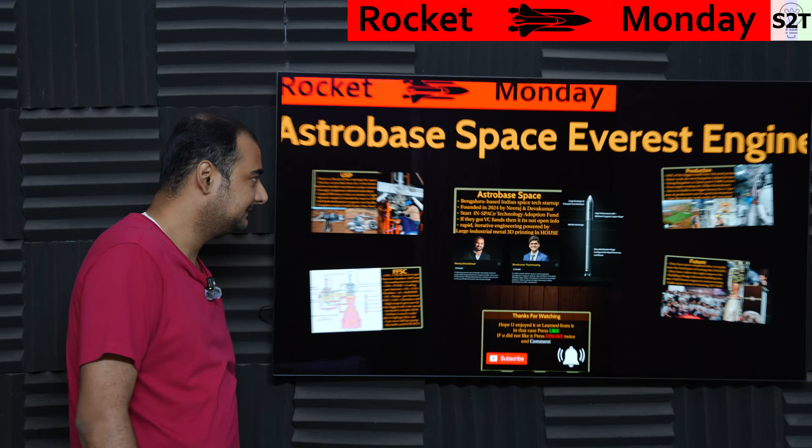So this puppy, Astrobase Space, is a Bangalore-based tech startup. Basically, Bangalore is our Silicon Valley, and it was founded in 2024. So it's a very young puppy, like horrifyingly young puppy. And Neeraj and Devakumar, these two individuals are the main horsepower behind it.

And the key ingredient, basically starter ingredient, I should not say key ingredient, starting ingredient is that the Indian government wants a private partnership. So they created a big grant, which is the IN-SPACe Technology Adoption Fund. So if you show your company and if ISRO finds it worthy, they're gonna give you some amount of money from that fund. It's not that big, that's why I'm pretty sure they have a venture capitalist fund.

But so far, as I'm making this video, as I have checked it, it may not be open to public where they got the money, because I know Skyroot got a lot of international funding, so there is a very good chance they also got it, because the IN-SPACe Technology Adoption Fund is better than zero, but it's really not that much. So that data is missing. It's not illegal, the government changed the law, so it is not illegal at this point in time. It's just that they are not sharing that with the public.

And their core essence, what they are bringing to the table, is this rocket, which is not the key point. They know that rocket is easy. They know the hard part is engine. Basically, if you think rocket is hard, hardest part in the rocket is the engine. So they're like, okay, we're gonna focus on engine first, because you can do tanks at the side, but you can't do engine as a side project. Engine has to be the primary project.

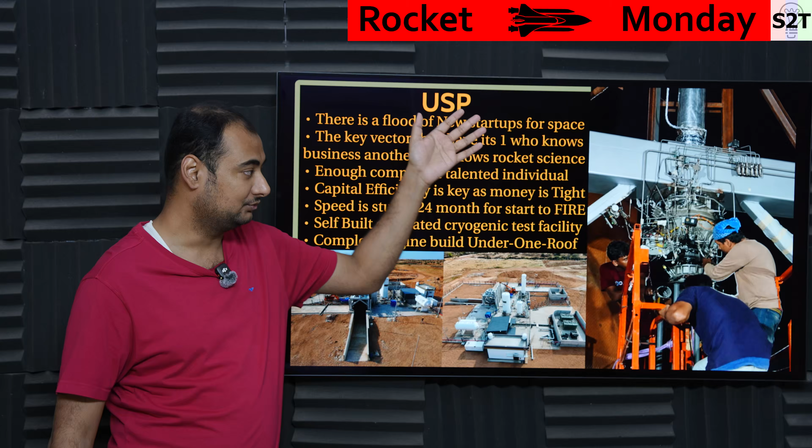But you have to be efficient with that, because again, they're not buying cheap things. That printer is expensive. So the fact that they went from company registration to actually ready to fire engine. Again, they did do fire, but on a small scale, like injector testing and all that. But reaching a point where you can see, okay, this is the rocket engine we are building.

And they only started 2 years ago. That's fast. And so far, so good. Almost reaching the same point where the other companies can. They built this dedicated cryogenic testing center. This is a big deal because while there are a lot of companies in India, ISRO knows this data point from a fact that not everybody has a rocket test site.

Yes, you can build a small testing site in a remote area where you can test some thrusters or a very small engine, but anything significant, an orbital class rocket engine, even one of that engine, that's not happening. None of them have that. So right now the current approach is that you go to ISRO, ISRO organizes it for you. Problem is ISRO organizes it with you.

For example, if ISRO has a priority requirement for any of the national projects, let's say NavIC navigation systems or PSLV upgrades or GSLV Mark III upgrades or whatever have you, you're just gonna be slid. You have to deal with that because again, ISRO's infrastructure is for ISRO first. Then you have a lot of other companies also betting on that same infrastructure. So a lot of scheduling hassle.

Now, the idea is, of course, they're gonna go to ISRO for the final testing, but to do rapid iteration, counting on ISRO is like government bureaucracy. So the idea is they're gonna build their own cryogenic full scale test stand, and they're gonna do rapid iteration here. Once they're fully ready, fully cooked, they are satisfied, then they're gonna go to ISRO. That is a far more logical approach.

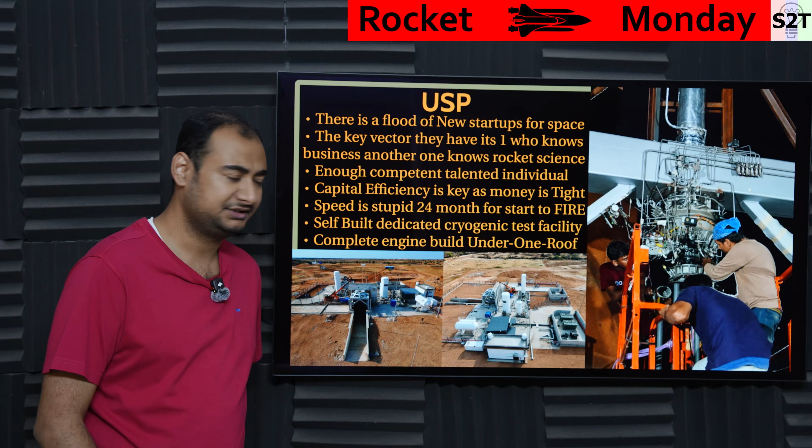And I can easily see that, assuming they have that sort of wiggle room left, they can recoup investment from this very effectively. So this shows a certain level of maturity. Even the 3D printer, assume the company goes bust, that printer still would be valid. We have this 3D printer, we can either sell it out for a bankruptcy or spin it up as a service. Tangible benefit, so to say. So they have a certain level of maturity.

They built a stand, they tested the turbo pumps, which was very clever because again, how the heck you gonna spin a turbo pump? You need a multi-megawatt class motor that spins at like 30,000 RPM or maybe more than that. Yeah, that's not happening. So they're like, hey, what if? Hear me out. We flow water through it.

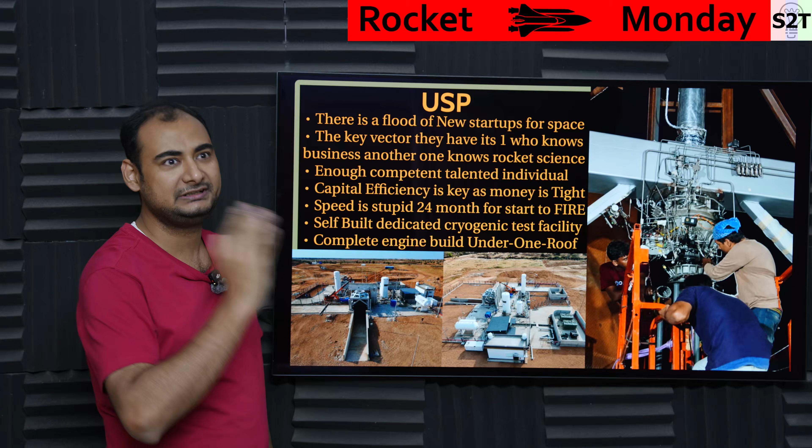Again, water pumps are available. A multi-megawatt class water pump is like, bro, who cares? So what if you use that? It's stressful because water is high density compared to methane or even oxygen, but clever. So they do have certain things that tell me that they have been cooking this for a long time. They thoroughly thought out what they're gonna do, how they're gonna do it, what they're gonna build, and they have some grunt behind it.

Now, full flow staged combustion. Assuming you have not watched my video from years ago where I already covered this - if you have watched that, skip this. If you have not, let's dive deep into it.

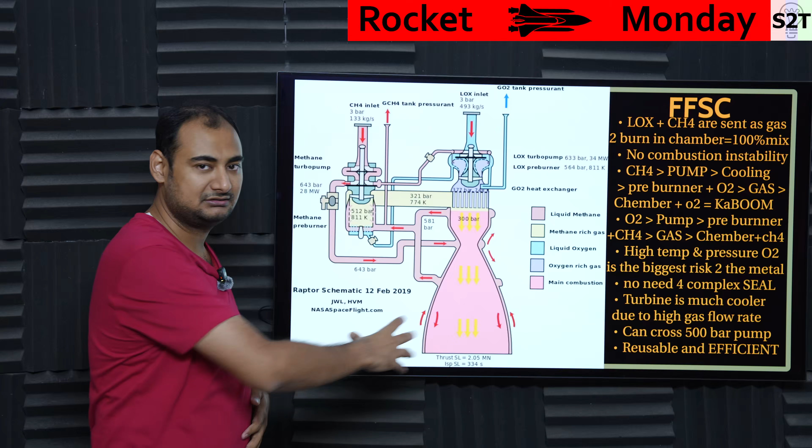So you start with LOX and methane. You start with liquid CH4, it goes in, and you send it to the pump. The pump dumps pressure into it, a bonkers amount of pressure - give or take 600 bars. That is a GG amount of pressure. You have cryogenic liquid with a bonkers flow rate that goes through the engine, the bell nozzle itself, and you cool this puppy.

Now you have rocket fire going on here. So this bell cools down, and the fluid that was cryogenically cooled at this point in time starts to boil. Then it goes into the pre-burner.

Pre-burner, you do math here. Basically, if you figure out, hey, I'm going to flow give or take 133 kilogram per second, how much oxygen do I need to properly vaporize this? So the small blue pipe you're seeing is designed such that - let's go with a number - say they need 5 kilogram of liquid oxygen flow to make sure that when they burn that 5 kilogram of oxygen inside the methane flow stream, it will vaporize 100% of the methane.

The key is, here when this cooling happens, some amount of methane becomes gas, not 100% of it. Here, 100% of it becomes gas - high pressure gas. So that's what they're doing. This fat pipe carries some amount of carbon dioxide, some water vapor, and a bonkers amount of methane gas going into your injector plate.

Now, so far this seems extra convoluted - why are you boiling off all of your methane? If you look at the F1 engine of Saturn V, that had something known as combustion instability. Combustion instability is a side effect of liquid combustion - if you have liquid oxygen firing on a jet of liquid kerosene, you have to atomize it. On paper it sounds easy - spew the jet, atomize it, burn it. In real life it's like lol.

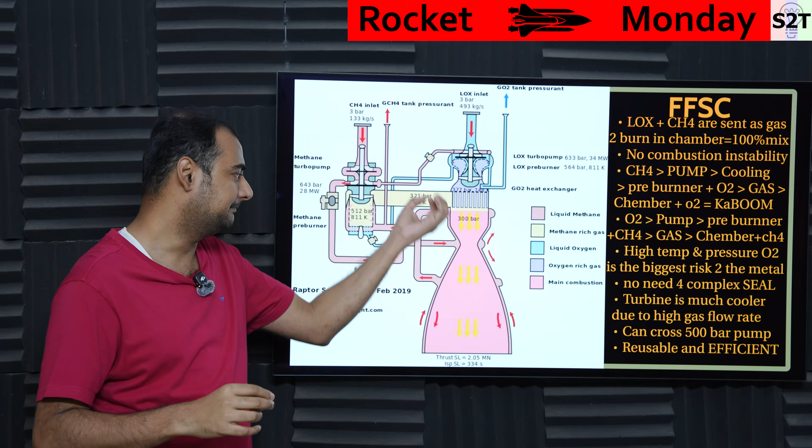Now you have two gas streams, high pressure, high flow rate, and it burns. Because the starting pressure was 600 bars - even in this liquid turbo pump it was 600 bar - after going through all that hassle, you're still at 300 bars of gas, and then you burn it. So then you go whoosh. That's how they achieve it.

Now, they do not want to use liquid oxygen or gaseous oxygen specifically anywhere, because that sort of gas at high pressure, high temperature, high flow rate will cause damage - it will eat through it. There is no metal known to man that can handle that. So how does this area handle it?

Well, this is the reason why oxygen is on top - they're like, oxygen, oxygen, go. They do not want to circulate it and delay - that's the whole requirement. And this turbine is the black magic technology.

The Soviet Union burned money like there was no tomorrow on this. America almost thought this was impossible to do. And SpaceX now has a patented metal that grows a ceramic layer in order to make a so-called turbine that the oxygen reacts with - it creates the ceramic layer that allows the turbine to survive. That's the black magic part.

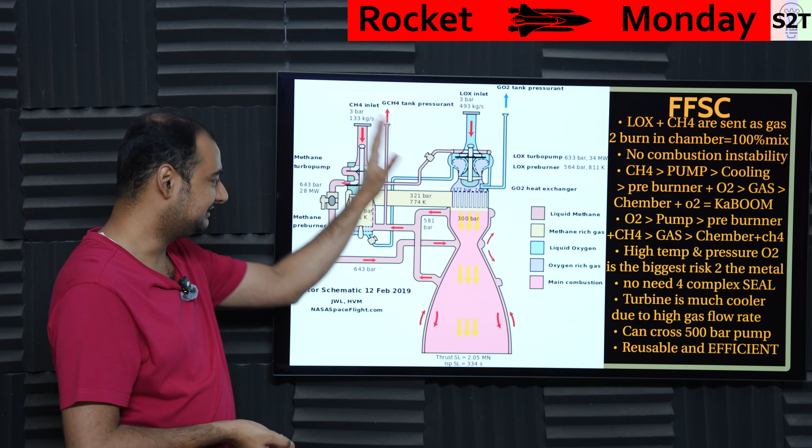This is difficult, but not impossible. This is black magic - how the heck do you have a turbine that can handle this? Burning itself, that's easy. What is the flow? Flow is high temperature, high pressure, high flow rate oxygen gas - metal burns at that point in time.

So somehow they have to have this black magic technology here. And that's the special sauce. Again, the plumbing is also a hassle.

You remember, like I talked about, it is already pressurized. That's why starting a rocket engine is so cumbersome, and you can't just have a starter motor spinning these things up. You can't have enough pressure. So generally they use nitrogen flushing to start all of this, spin, start and all that. It's a very tricky ignition sequence, so to say.

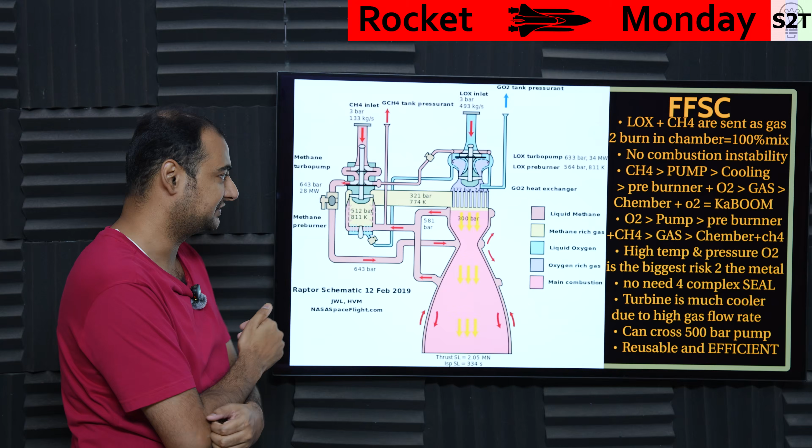So you take oxygen, burn it, whoosh. You take methane, basically pressurize it, cool everything, boil it, whoosh. That's how it works. And some amount is always tapped up. Let's say you have some amount of liquid oxygen, you're gonna boil it and then send it back into your tanks to pressurize it.

Again, I'm not sure whether Astrospace or Astrobase is gonna do that, but SpaceX does do that. And there might be some other circuitry also. I have seen people claiming that it has helium circuitry, although I don't see why. You will hear this term helium seals.

The reason is if you go into the RS-25 engine, which is the space shuttle engine, it had one system that was spinning up both fluids. Problem is you have both fluids. If you mix them, kaboom. So how the heck do you make sure high flow rate hydrogen does not leak through and mix with oxygen and go kaboom? Again, be mindful, hydrogen leaks through everything.

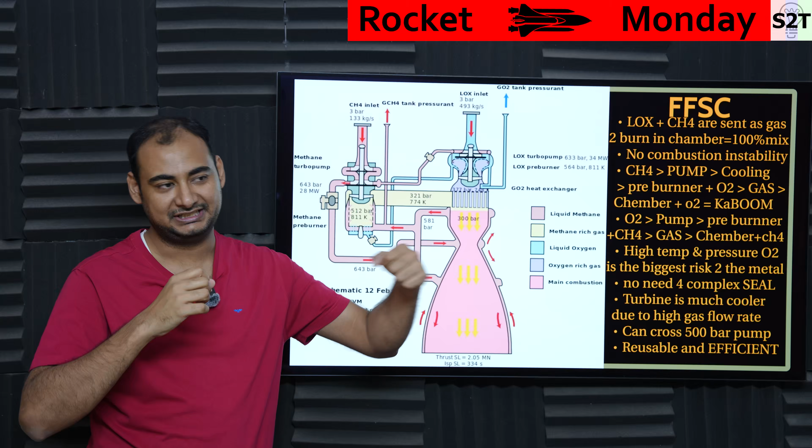So they have a seal gap. In that gap, they have high pressure helium. So basically, helium is forcing hydrogen to not leak. Oxygen is easier to maintain.

So in this design, they don't have to do that, because here's the deal: what is the worst case scenario? This valve opens up fully, it's like whoosh, but that means nothing, because this valve was designed from day one to choke flow, not extend it. Basically, this is not throttling anything. It's just like full throttle or zero.

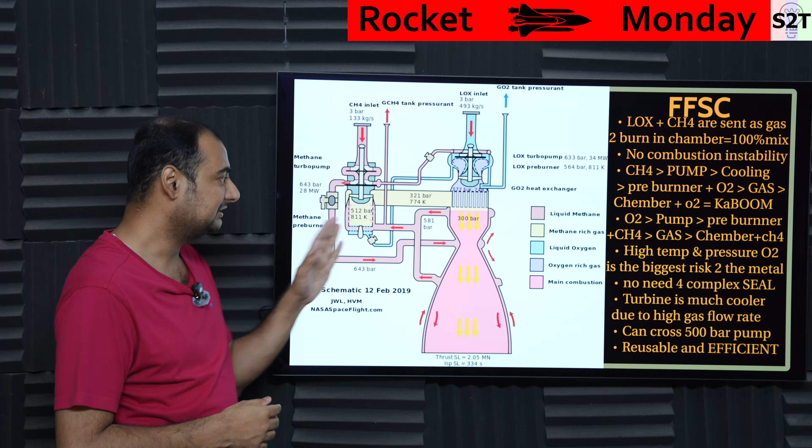If this valve breaks, 100% of methane goes into the oxygen pre-burner, it's still within stress margin. It will not cause any issue. Same happens with this oxygen flow. What if this valve fails and it goes full flooding oxygen? Again, nothing will happen. You will lose control authority, but it will not go kaboom. So that's why you do not need magical helium seal technology for this also.

One thing that is a benefit of going through this much trouble is the flow rate is high. Like you are talking about 133 kilograms of gas flowing through it. It's huge. Ask any compressor people how huge that number is. It's huge.

Meaning the turbine here is relaxed. It's not super duper high pressure. Sorry, pardon me, it's not super duper temperature, meaning it's not stressed. The metal is not stressed. It's dealing with almost something that feels like a gentle water flow. It is high density, so it does feel like water flow, but much cooler. If you did not have this sort of flow rate, you had to keep temperature higher, and higher temperature means higher degradation on that.

And again, same goes here for this oxygen system, you have to keep the turbines chill, brother. So you're overflowing it. You have to deal with the chemical part, but you do not have to deal with super duper high temperature also.

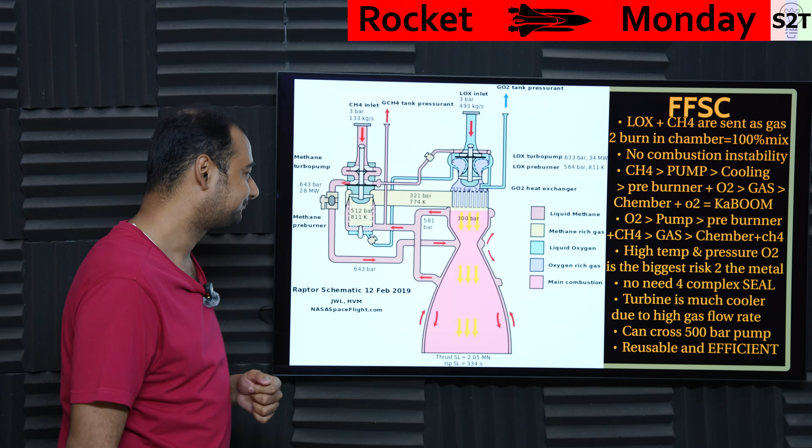And to achieve 300 bars in the chamber, the turbo pump output must be much higher than that. In this design, I do not know the tangible mathematics of that, but generally they are in the 600 bar range. So we are talking about something serious here.

No seal required, turbines run much cooler, and pumps can easily cross 500 bars. It is reusable. If you build this properly and figure out how to start this puppy, it can handle multiple cycles, basically behaving almost like a jet engine where you just turn it on and keep it on.

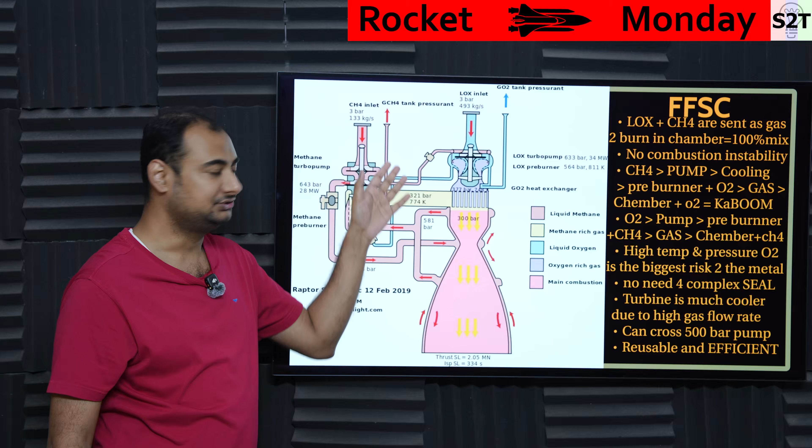This is the good part of going through this much trouble. It is far more sustainable, and because the fuel chosen is non-kerosene, it does not have that coking issue which Merlin has. And because it's not throwing any gas away, combusting all of it, and combustion is happening 100% efficiently, you are getting the most efficient topology known so far. That's why people find this topology to be the holy grail.

If you can build this, and if you can sort out all the plumbing issues, this is amazing.

Now, what about this company?

Well, here's the deal. One of their biggest assets is that multi-laser 3D printer, and they already built a starter factory because they needed that printer. That printer required like 3 trucks to deliver it. So they built basically a starting area for just getting things rolling, building the engine. That area can only handle 1 rocket, so they're starting out small.

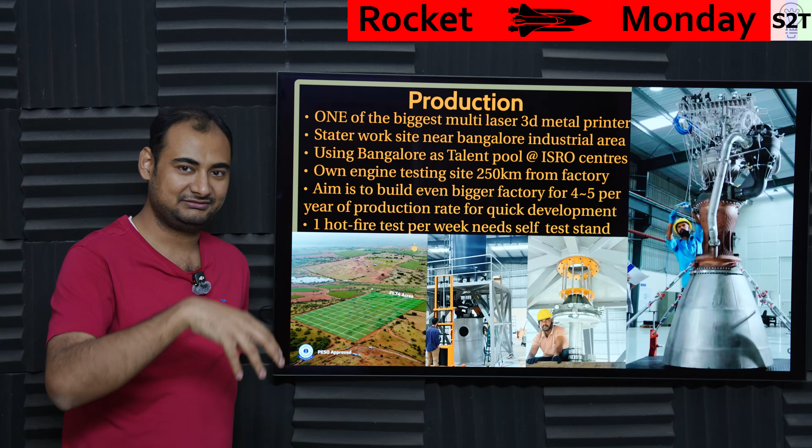Now, why Bangalore? Well, again, it's the California of India, so it has a talent pool. I used to live in Koramangala, an area where my house was. There was a restaurant there where we used to go eat lunch, Udupi. Next to that was ISRO. If you stayed there, you'd see a lot of ISRO scientists. Move into another section, you'd find a lot of HAL scientists. Move a little more, you'd find a lot of DRDO scientists. That whole road, old airport road, was filled with talent, more than you can shake a stick at. So spot-wise, from an aerospace point of view, it is talent rich. So they're like, we got the talent.

In India, PESO approves this sort of thing, and they did get it approved. It's far - again, you can't do that in Bangalore. It is 250 kilometers away. How bad is that? Well, it's connected by highway, so I can easily see them packing up the engine in the morning, everybody going home, having a good night's sleep, coming early the next morning and driving, and by evening they'll have engine firing at that site. So it's far, but not that far.

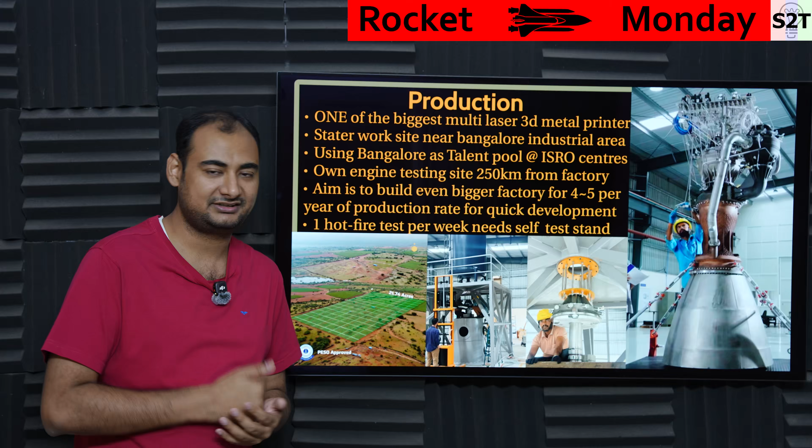This is why I'm saying somebody either already knew they're gonna do this - like they registered the company last, as in they built everything, sorted out everything, who's gonna do what, everything was sorted, and then it's like, okay, let's just register the company. So that does show a certain level of maturity.

It's like, we know we're gonna make a reusable rocket, but factually the likelihood that our first rocket is gonna work is basically zero. It could happen, but they're directly trying the Everest engine - they call it Everest because it's the most complex engine there. So the likelihood is very low, and they can't be like, oh, we fell apart because our first engine went boom. They have to be rich enough hardware-wise that they're like, yeah, no, we can try 5-6 times.

That's why that printer in-house matters. That's why having their own launch site for testing matters too - let's say they test this and it goes boom, ISRO will become very upset with you. If it's your own launch site, who cares?

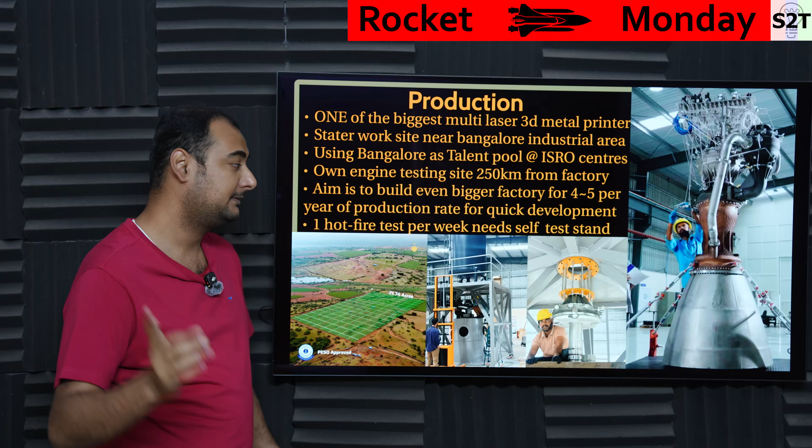So their aim, what they're targeting for, is 1 hot fire per week, so they can reach the final goal they're thinking of - basically orbit in 2028.

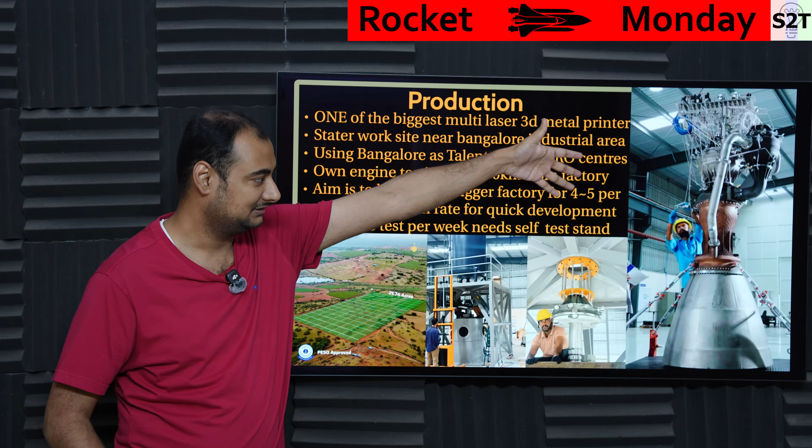That is way too optimistic, but again, they may have been working behind the scenes, because this is the turbopump assembly testing. They flow high pressure water through it to test it. I do not know, from a pressure point of view, I don't get it, because again, water is much higher density. So is it a valid test or not? But apparently it is for them, so they are using it. And yeah, do not worry about that sort of plumbing mess. It will go away once you actually have finalized the engine design.

So what can we expect in the future? Well, they have just completed the first build. Again, this has not been fired. Trust me, as someone working with engines, if you make an engine and you fire it and it works, you're not gonna shut up about it. They have not shared it. So it's not been fired.

They have built it, showed it, and they did have a small mock-up, basically injector tests and all that mathematical testing. They did have fire, where it's like, okay, liquid oxygen and all that. They did that. So they know what they're talking about, but this puppy has not been fired yet. This has been demonstrated that we have built this, and we're gonna carry it to our cryogenic test site to test it. But again, that's the hard part. So they are taking very right steps so far, I have to say.

Building in-house, including valves. Now you might be like, okay, why do you want to build valves? This is a critical part. While a valve is a quote-unquote sorted technology, it's not robust technology. Meaning, can you buy a valve from a manufacturer that's like, no, we know how this works, we have been dealing with LNG or LOX, something like that? Yeah, of course you can. There are a lot of industries that use that.

But valves are the primary component in most rocket boom events. Almost all rocket boom events are a valve going kaboom. Be it Boeing booms, be it Blue Origin booms, almost all of them. SLS going back to the tower to be refurbished, hydrogen leaking valves, always valves. So they are like, while you can buy a valve from outside, you can pay them, it's still hit or miss. So if it's still hit or miss, why don't we try to do it in-house?